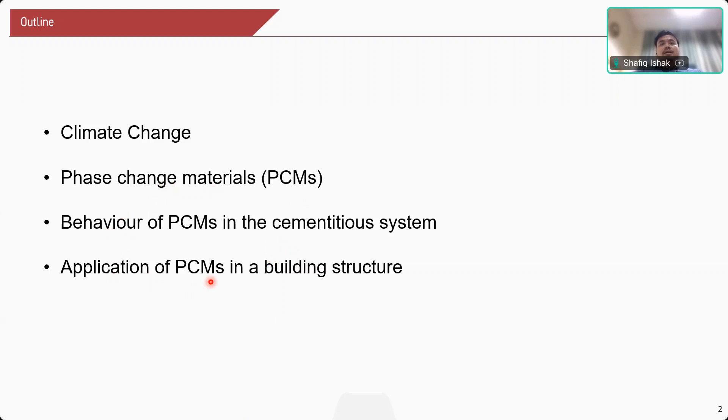Climate change is a major concern, not only in Malaysia, but throughout the world. We are having problems like heat waves, depletion of the ozone layer, melting of the glaciers, and drought problems. This is a major concern that we need to minimize, and if possible, overcome.

The International Energy Agency has reported that buildings are responsible for almost 40% of the final energy use and CO2 emissions - that means the total CO2 emissions. It is one of the most critical sectors in terms of energy consumption.

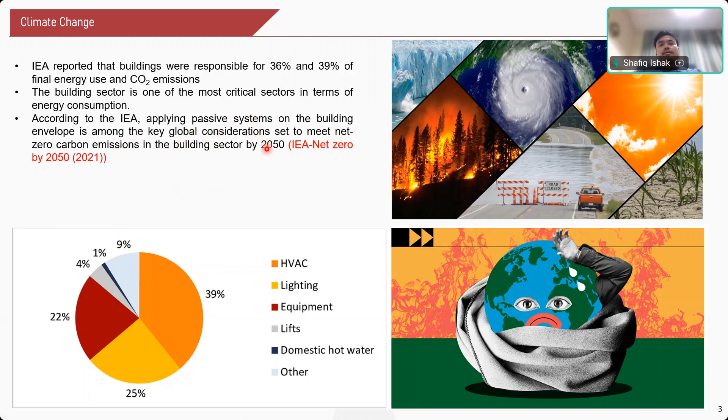Inside buildings, we are using a lot of energy, and it is very important for us to apply passive systems, which we can achieve by implementing phase change materials, to meet net zero carbon emissions by 2050.

I have been doing research on phase change materials for the past 6 to 7 years. One of the reasons I'm focusing on these materials is the heat wave problem that strikes my country, Malaysia. We have been having this heat wave problem for the past 10 years. Even though Malaysia has rainy and hot days throughout the year, for the past 10 years we have been having heat wave problems, usually in the middle of April and May.

This doesn't only strike Malaysia, but also India, Bangladesh, China, Thailand, especially in Southeast Asian countries. When we have this kind of heat wave problem, we have to drink a lot of water. And if we are inside our home, we will use a lot of electricity. The electricity consumption will be very high because we will use a lot of air conditioning to make our bodies comfortable inside the buildings.

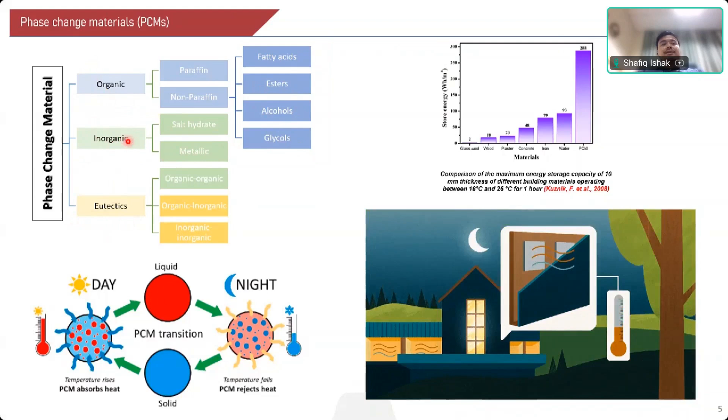Basically, this PCM has the ability to absorb heat energy. During the day, it can absorb heat energy and turn - let's say the PCM is in solid form - it can turn to liquid. Then during the night, when the temperature falls, it will release back the heat energy and become solidified. The next day, it will melt again, and at night it will solidify. So this PCM can sustain in the long term.

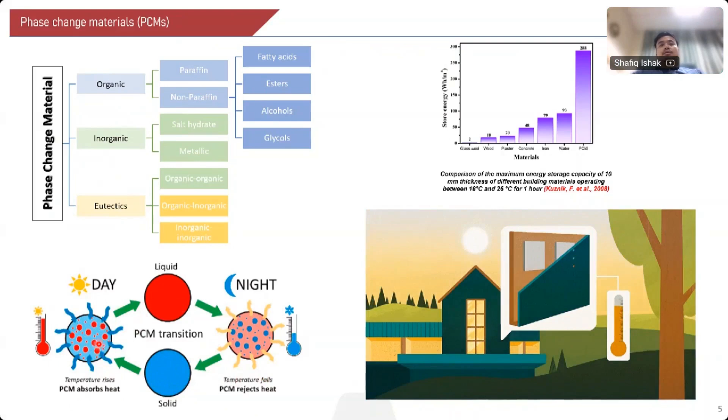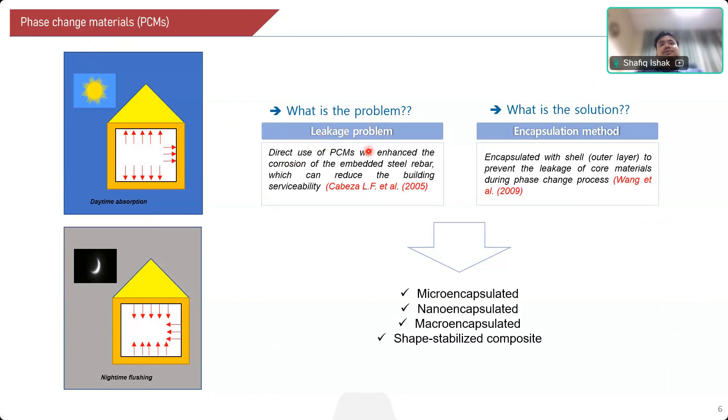That means it can be used for long-term applications, especially in building structures. However, the implementation of these phase change materials inside building structures has a huge problem, which is leakage. If we directly use this PCM, it will enhance corrosion, and it will react with the hydrated phases if you directly mix this PCM with cement.

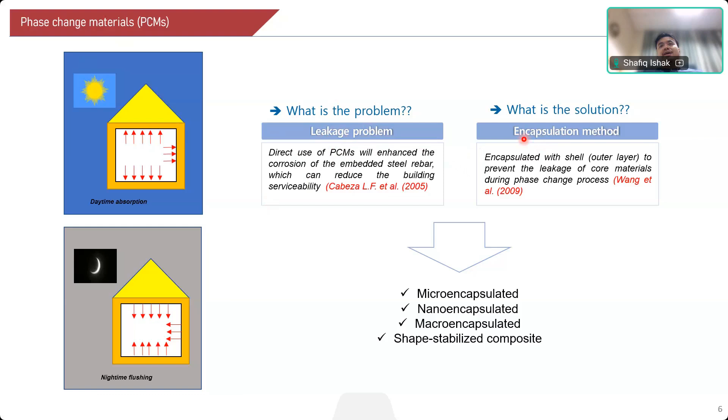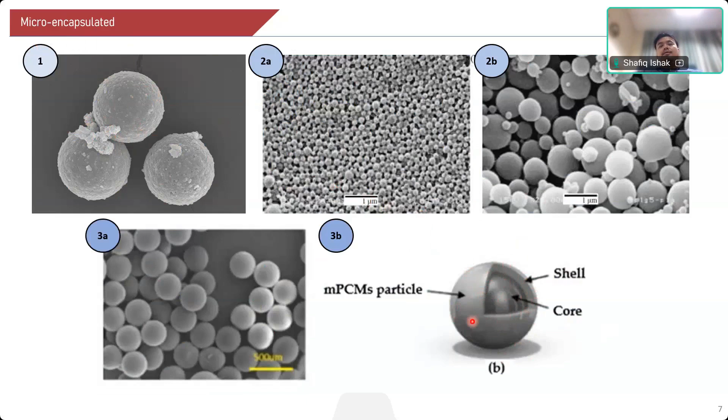One solution that can be used is applying the encapsulation method. There are many types of encapsulation methods that we can do. One way is to synthesize micro-size encapsulated materials, where the inside core material is the PCM, and the outside material can be any organic or inorganic material we can use. We can also have nano-size, which is a smaller size of encapsulated PCM, and macro-encapsulated PCM, which is in a bigger size.

We can incorporate this PCM inside the hollow section of the bricks. And then the next way we can use is as a wall panel, incorporating this PCM as a wall panel.

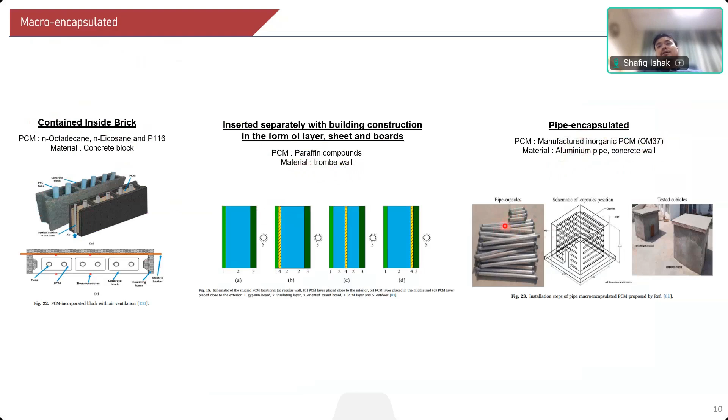Another way we can incorporate it is by using a pipe encapsulated, where we have a hollow pipe, and inside the hollow pipe we incorporate the phase change materials. This can be one of the components in the building structures.

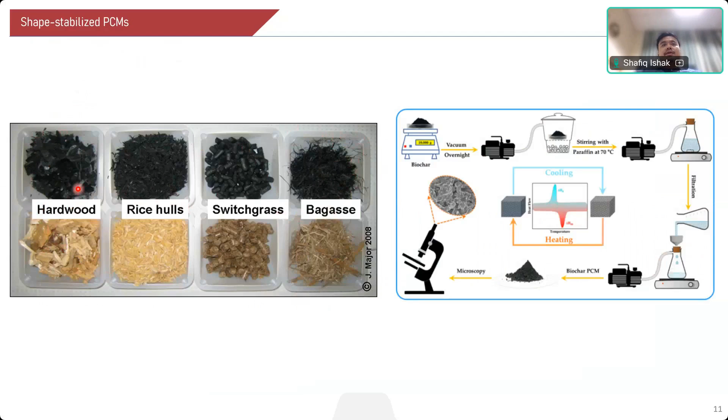Next is shape stabilized PCM, where you have a biomass and you turn the biomass into biochar, which should have a high pore structure. You have to activate the pore structures, and then inside the pore structures, we can impregnate the phase change materials.

So the behavior of this PCM inside the cementitious system - this is one study where they used Portland cement with microencapsulated PCM. They added various amounts of PCM to the reference mortar and concluded that there is no interaction, meaning the PCM, if it leaks, will not interact with the hydration products. However, if you add 15% PCM into the cementitious system, it will increase the porosity of the composite.

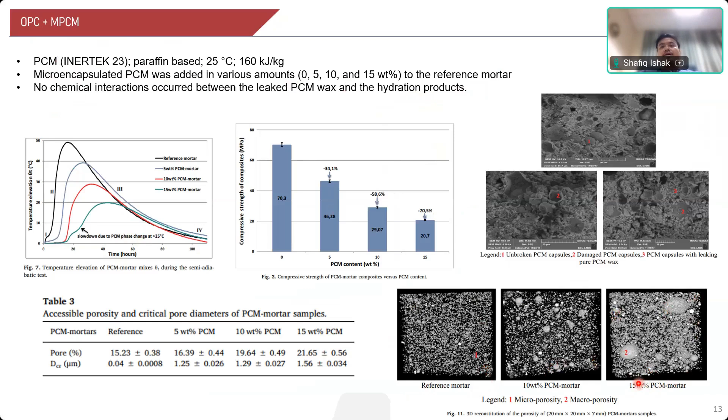So if you have an increase in porosity, of course you will have a reduction in the mechanical performance and also the durability.

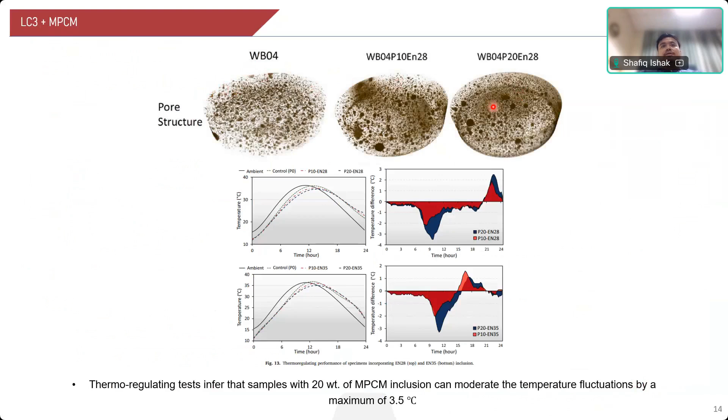And this is some of the study where they have used LC3 cement with a microencapsulated PCM. You can see here the pore structure increasing.

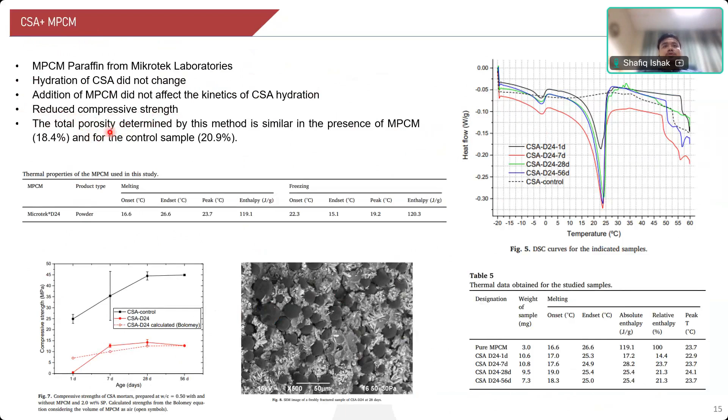And some studies are focusing on calcium sulfoaluminate cement with a PCM. They concluded that the addition of this PCM will reduce the compressive strength, and also it will reduce the total porosity with the presence of these PCMs.

This PCM can also be used in 3D printing technologies, where using a PCM can decrease the hardening evolution over time, and also result in reduction of mechanical strength.

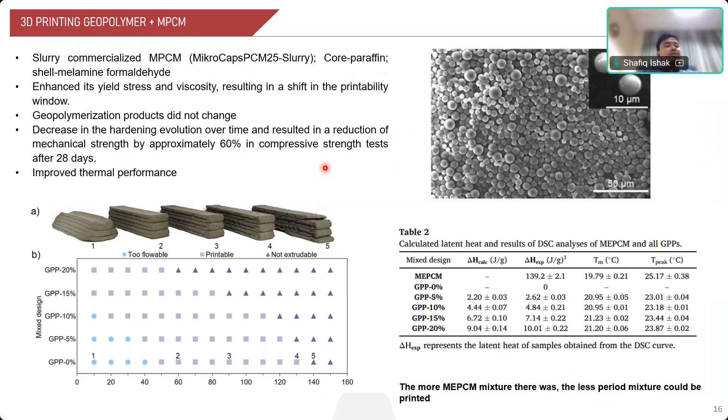So we know that this PCM, if directly incorporated inside the cementitious system, will give a lot of problems, especially on the mechanical performance. So there is still a huge gap to be filled in this area, especially how we can minimize or reduce these strength reductions if we are applying this PCM inside concrete structures.

So this is some study that I have done. When we are incorporating this nano size PCM, there are active bubbles coming out during the mixing process. These active bubbles can lead to very high porosity of the composites.

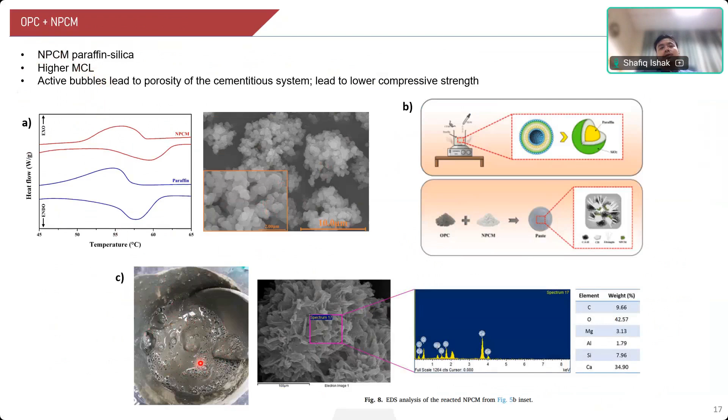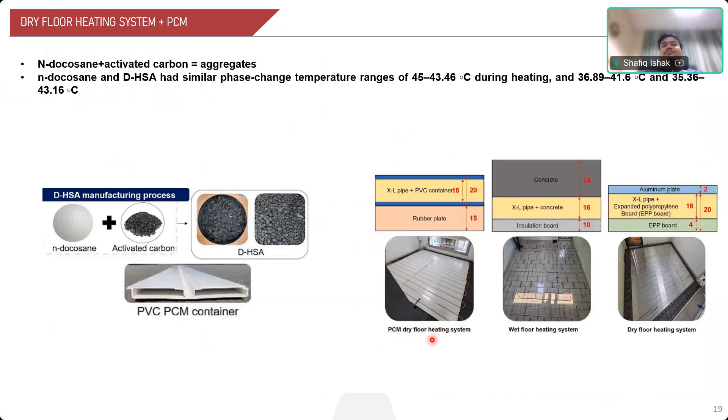So some applications of the PCM - not only can you mix it inside concretes, but one way is it can be used as a dry floor heating system. This study was done in South Korea, which is a four season country. They are applying this PCM as a dry floor heating system, which is very efficient, especially in the winter season.

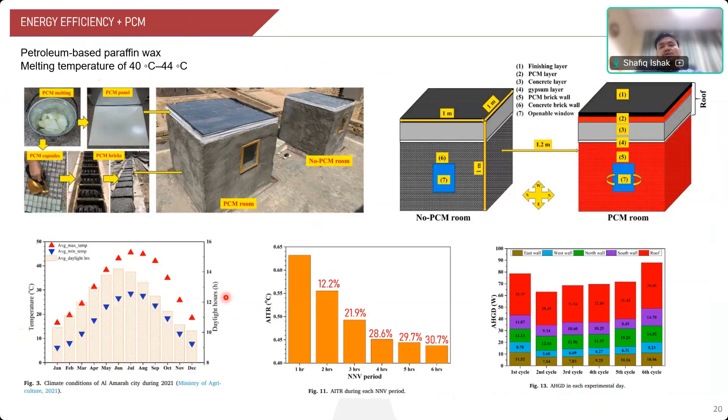So as a conclusion, this PCM is a very unique material that we can use inside building structures to improve the thermal comfort of the building. However, by adding PCM into concretes, it will reduce its mechanical performance. That's why I'm saying there is a huge gap that we need to fill - how we can add this PCM without changing its mechanical performance, without reducing its strength.

Also, adding a high quantity of PCM is a very huge challenge. We can add it using macro encapsulated techniques, but it is also very important to add the PCM using other techniques like shape stabilized, micro encapsulated, or nano encapsulated materials.

These phase change materials can also be utilized for a wide range of applications, not only building structures. You can use them in solar energy applications, in medical applications. So there is huge potential for other applications, not only in buildings, but also for other applications because of their unique behavior to absorb heat energy and also release it back.